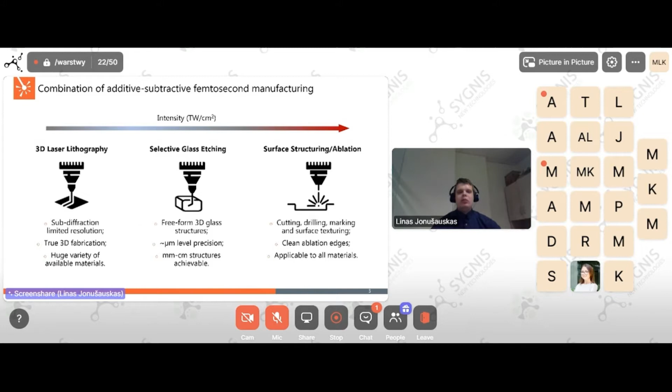We have several technologies at our disposal, and I'll mention the primary ones. The first, and of course the most simple, is just ablation or drilling, also sometimes called cold ablation or cold processing. The idea here is that because we have very short laser pulses, the interaction time between light and the lattice of the material is actually shorter than the heat dissipation from the affected region.

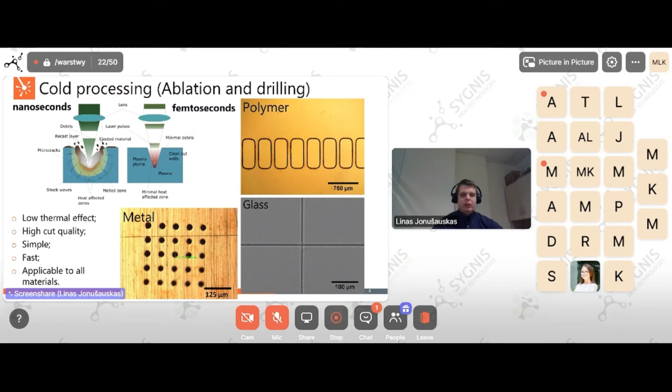So this is why the laser in this regard acts less as a heat source, like most of the other laser systems, but more of a cold tool that basically allows it to ablate. And because of that low thermal effect, we have very high cut quality. We also have a very simple process at our hands, and basically we can cut fast in almost any material imaginable.

Also, if we tune parameters just right, instead of outright removing material, we can actually just modify its surface, or partially remove it and partially modify it. This is what is called femtosecond laser surface structuring.

The idea here is that if we apply it, we can on demand have either hydrophobic or hydrophilic surfaces, which are achieved due to controlled changes in the surface patterns. These can be hierarchical, meaning they can go from sub-diffraction limited nanometric scale to basically hundreds of micrometers in overall size.

And we can also play a bit with surface chemistry, because if we introduce a special atmosphere during the processing, it basically results in different surface chemistry, which in turn also signifies some of these interactions that we want after the processing.

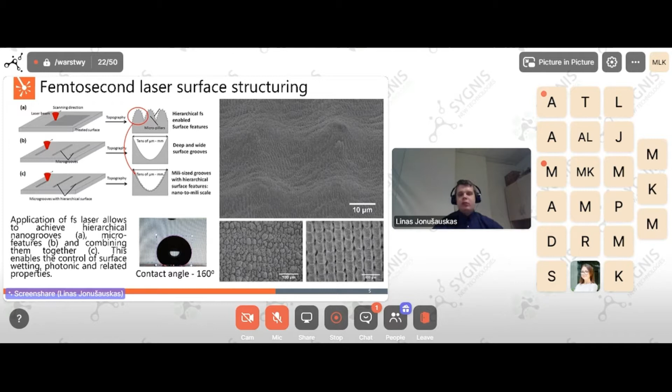This can have multiple different applications, including heavy industry for friction reduction or better adhesion, or otherwise in maritime and aviation industries for anti-icing or anti-fouling, etc. So this is one of the areas we're working on quite actively as well.

Now, these two technologies that I just presented are still more related to 2.5D fabrication, because you still have some limitations due to how you focus your laser light. If we want to go to true 3D, we have to have different processes, and selective glass etching is one of them.

This is still a subtractive process, but the idea is that instead of removing material during the processing, we're actually modifying it in a very specific manner. What it does is basically make it etch a lot faster when we put it into an etching solution, namely HF or KOH. In this way, we can basically have almost an inverted 3D printing, which means that we etch out what was exposed with the laser.

In comparison to, let's say, ablation, we can actually have true 3D shapes, including movable structures like this ball joint chain on the right. The idea here is that we have an outer layer and an inner ball, and basically they are intertwined.

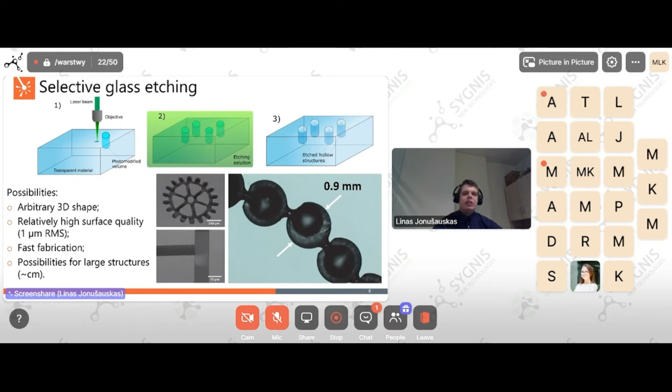What is important is that it's an assembly-free structure, meaning it was not printed, but fabricated out of a single piece of glass. Also, this allows us to have relatively high surface quality, and it's also a relatively fast fabrication process, allowing us to achieve even centimeter-sized structures in reasonable amounts of time.

And of course, if we want true additive manufacturing, we can definitely have it in the form of femtosecond 3D laser lithography, also sometimes known as two-photon polymerization. The important part here is that because it's an additive process, it's induced by focusing femtosecond laser light into a photoactive gel or resin.

Basically what happens at the focal point is that due to sufficient intensity, irreversible chemical reactions take place and the material hardens. While where intensity is not sufficient, the rest of the laser path besides the focal point, the material is not affected.

Then we put it into organic solvents, something like acetone or some alcohol. We develop what was not affected by the laser, and we have a 3D structure. Due to this writing process, we can actually have unlimited 3D architectures which are not bound to layer by layer fabrication.

Also, the spatial resolution can go to very small dimensions, something like 100 nanometers or less, if it is very desired. Of course, normal operation, something like 200 or 300 nanometers, is easier to achieve and simpler. What is most important is that this goes basically head to head with current polymer chemistry advances, and polymer chemistry is an extremely vast field.

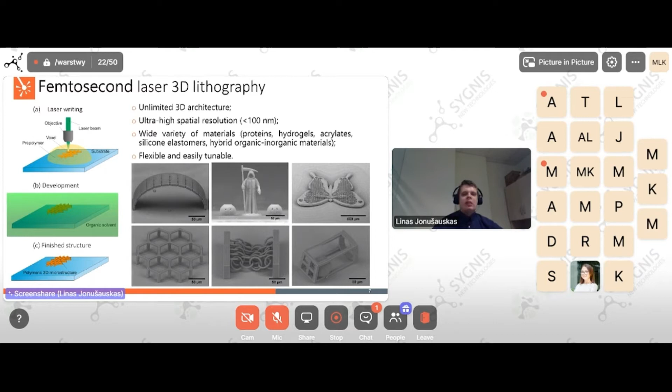Throughout several recent years, we were working quite hard on bringing this technology from laboratory level use to making it basically a widespread and applicable tool. These are just a few examples of structures that we made over the years.

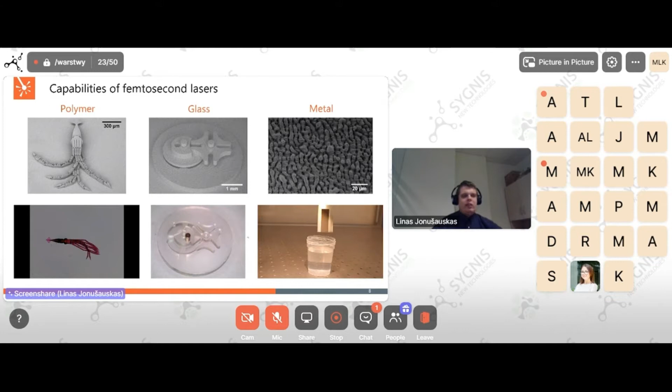These can be micromechanical structures such as polymeric micro robots, like this little squid which moves when the researcher moves the liquid around, or the Geneva mechanism that is freely turning in the magnetic field, or these structured surfaces that allow, in this case, and maybe I will launch it once again, extreme hydrophilic behavior. Basically, the liquid very easily goes up.

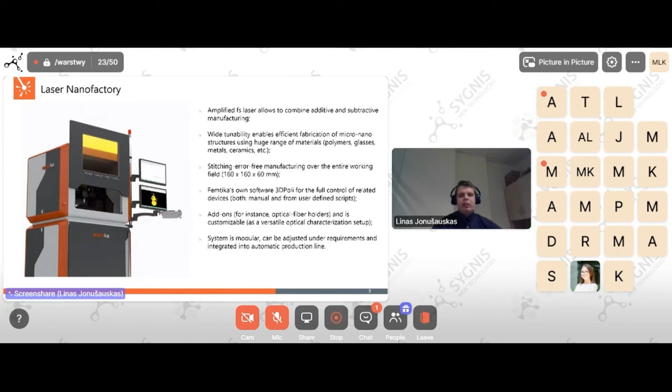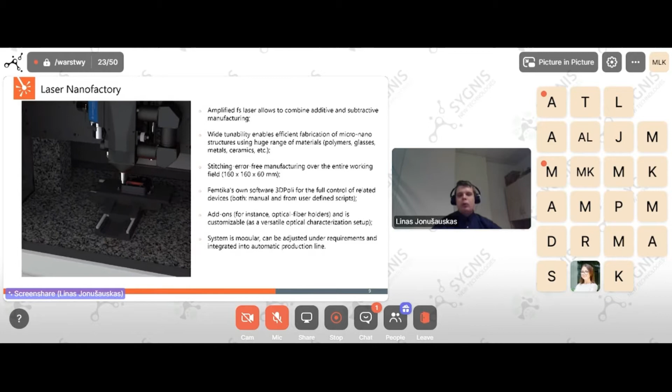All of this is realized with our system, basically the reason why I'm here, the Laser Nanofactory. I could actually talk quite long about it and its features, but the primary keywords here are modularity and flexibility. This system, in a lot of cases when we sell it, is tuned towards the needs of a customer.

At the same time, because of its modularity, it's also future-proof. Because if one day we create new technologies or new ways to process materials, we can backwards fit older systems as modules, allowing newer processing regimes, and some of our customers are already doing that. Basically everything I will show you from this moment on, and everything I showed so far, will be done with the system unless otherwise specified.

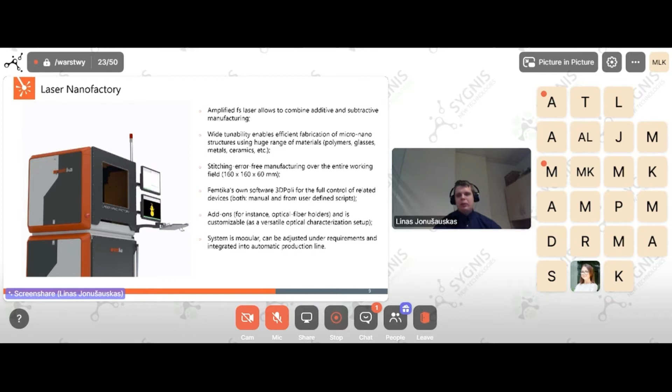Of course, when we talk about the system and this field in general, we want to go from simple toy demonstrations like the squid or Geneva mechanism to actual functional devices. For that, we need a field to target. The field that we're targeting now quite actively is medicine, because a lot of needs of the medical field coincide very well with what we can actually do.

Because the primary challenge nowadays is that we need medicine to be individualized, basically making sure that each patient is getting treatment or procedures specially tailored towards him. At the same time, we want this to be delivered at the point of care. So basically, we want to fabricate whatever is needed as fast as possible wherever the procedure will be carried out.

At the same time, it has to be effective. We cannot compromise on this at all, because the medical field requires very high effectiveness. Even nowadays, when we saw how much the modern world is dependent on effective medical care, this is signified quite a lot. At the same time, it has to be flexible, tying in with the individualized aspect of this all. And most importantly, it has to be affordable.

Because when you think about it, throughout the years a lot of scientists and engineers proposed a lot of different device and treatment concepts, but a lot of them fell short just because they were extremely expensive, and the effectiveness-to-affordability ratio was just not sufficient. To tackle all of these challenges, which in some ways can actually be counterintuitive to each other, like effectiveness and being affordable, a multidisciplinary approach is needed, and only then can we tackle these challenges.

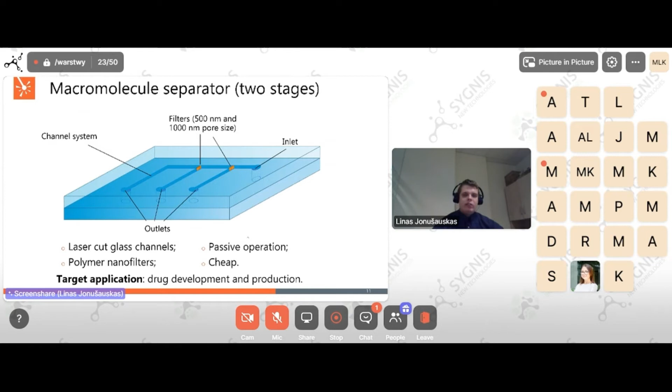Otherwise, our target applications are drug development and drug production. And these days, this is quite an important challenge. Now, for this, we use the same nanofactory setup, and I just wanted to show the insides of it. The primary idea here is that we have a very flexible laser, a Light Conversion Carbide laser, which supports 2 wavelengths. We have an appropriate optical chain to control it.

And what else I can stress is that we also have a built-in imaging system, which allows us to track fabrication in situ in real time. Also the linear stages and scanners are synchronized, which allows us to achieve this mentioned high speed of fabrication as well as very high precision. This is our standard system, and I will show some different variations throughout this presentation, and you will understand why modularity is so important.

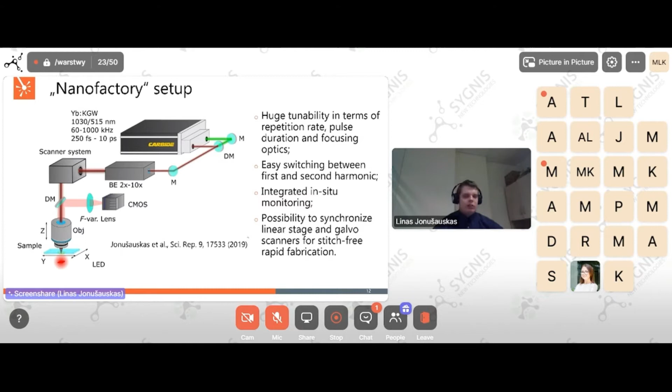Now, for this particular challenge, we need 2 different structures that will need to be merged together. So first, we need filters. We did a very simple experiment where we fabricated different pore sizes by changing the hatching distances between lines. We saw that the relation is near linear and actually very controllable and quite well repeatable. Pore sizes that we managed to achieve were from around 250 nanometers to 1.5 micrometers. Of course, at very small pore sizes, these start to break due to capillary forces and other effects.

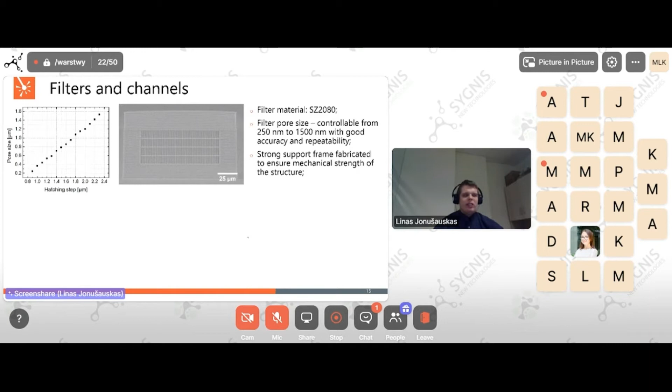So maybe some more advanced processing would be needed in future, but so far we went for experimental structures with 500 nanometer pores. And at the same time, if you notice, we also made a strong support frame. The idea here is that due to strong support, the whole structure has rigidity, but at the same time, we perform what is called dynamic slicing and hatching, and the surface of it is not really nice, but it's strong enough.

And at the same time, we need channels. For channels, we use just simple cheap soda lime glass. It was cut with the same laser nanofactory setup. We just replaced the standard lens with an aspherical lens. And again, because we were aiming at fast fabrication, we noticed that our theoretical profile differs from practical within around a 5% margin, but we consider that good enough. So we have these two different components.

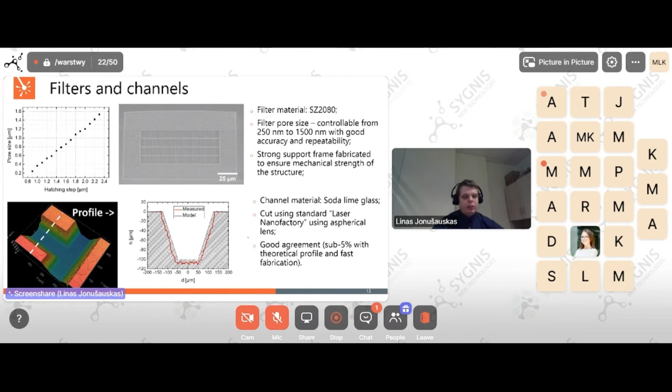Let's merge them together. We integrated filters into channels. We saw good adhesion and good mechanical stability. Our initial channels had quite rough walls, and we wanted to potentially improve it by performing HF etching before filter integration. It helped partially, but we consider that it's not worth the hassle of dealing with a dangerous chemical. But otherwise, in principle, this worked pretty well. Although it doesn't really look that nice in SEM images, it works just fine, and the structure is quite mechanically robust. So we have a channel system, we have an integrated structure.

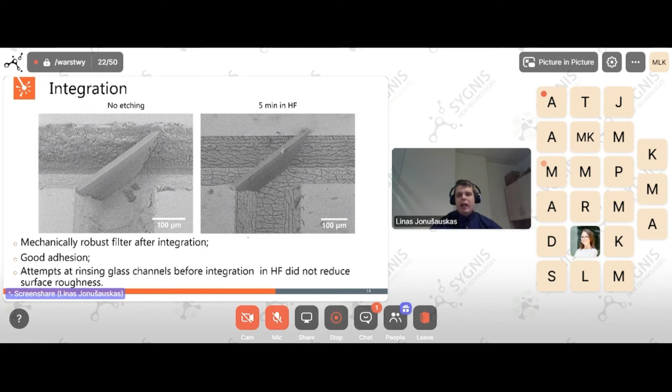So the question now is how we seal it. Normally we could use a lot of different techniques such as welding or selective polymer bonding, but the problem is that we need to have very good alignment, and we also need to have very good optical surface contact. This complicates the process, and it makes it less repeatable. So our researchers proposed a different idea of using thermal bonding.

The idea here is that we start with a clear polymeric slip, and we put it on our glass microfluidic system with integrated filters, and we heat it up to 190 degrees Celsius. What happens is that this clear thermoplastic starts to partially melt and bonds to the glass channel system without any additional operations.

And this is why I mentioned the advances of polymer chemistry, because for filters, we're actually using quite a resilient hybrid organic-inorganic photopolymer that is not affected by this thermal process at all. So it means that because we can use different polymers, we can actually achieve a favorable overall outcome.

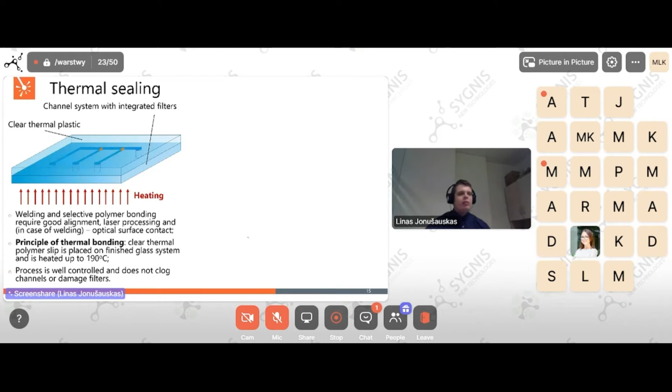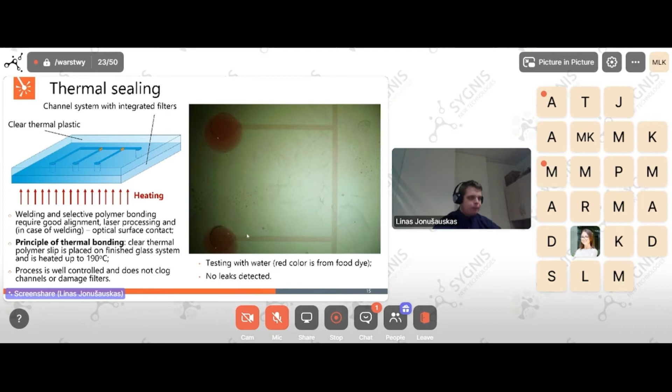And because the process is actually controllable, it doesn't clog the channels, which is proved by this image where we actually use just simple water with food dye, and we saw no leaks or other defects. However, let's very briefly return to the channel quality. It is good enough, but we want to make it better.

So we proposed using what is called burst mode fabrication, and this is where modularity comes into play. Because instead of a standard Carbide laser and sharply focusing optics, we actually used a nanofactory variant where we have a more advanced Pharos laser with burst mode capability. And also we replaced the simple focusing lens with an f-theta lens, which means that we have substantially higher processing throughput.

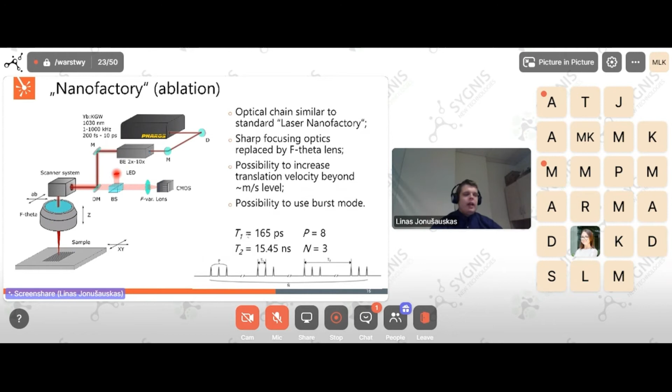And basically, without going into too much detail, because this is still the far front of photonic science, and this is why, as I said, we do a lot of in-house fundamental research. Basically, burst mode fabrication allows us to control thermal effects even better than just simple femtoseconds. So we have femtoseconds and burst mode fabrication. This allows us to have both meter per second level fabrication speed and substantially better channel walls.

And this also results in very good filter adhesion. This can also be sealed with the technology I presented before. And this signifies why having modularity in the system is such a powerful advantage. And overall, these channel systems are now provided to our biochemist colleagues, and they are now doing filtration experiments, hopefully as we speak. So this is the first concept.

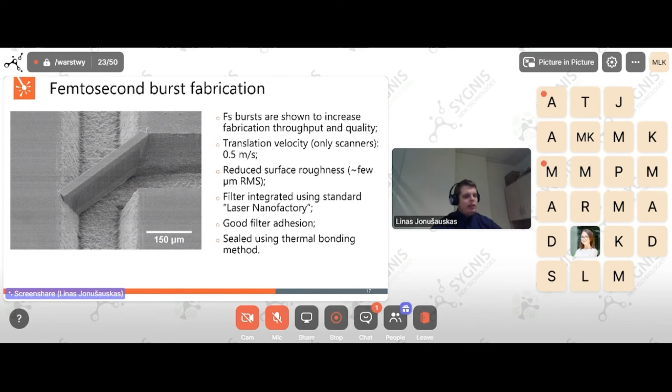The other concept is mechanically flexible scaffolds for cell growth. Scaffolds are quite a vast field these days, and the idea is that we make a structure which allows us to either perform research on cells, or potentially cultivate cells for different uses, or grow cells for implantation in a living body. And these are very promising prospects in biological sciences.

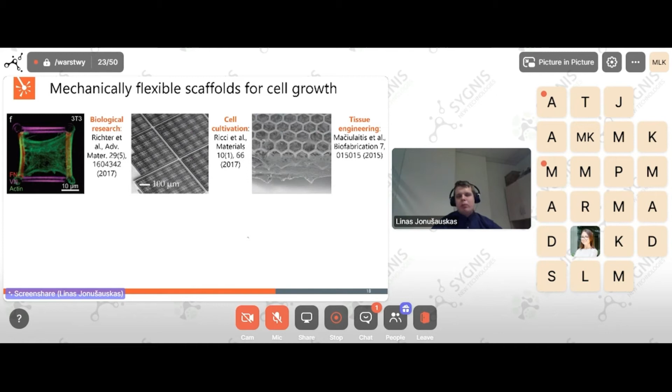The problem is that most of the normal materials that are used in this technology are rigid in a mechanical sense. And of course, the body is moving constantly. So putting something rigid into a moving body might not be the best idea ever. So basically, there are two choices. One choice is to have a flexible polymer, and albeit these are coming along and we're experimenting with them as well, there's still a long way to go before we can proceed from proof of concept level fabrication to highly efficient fabrication.

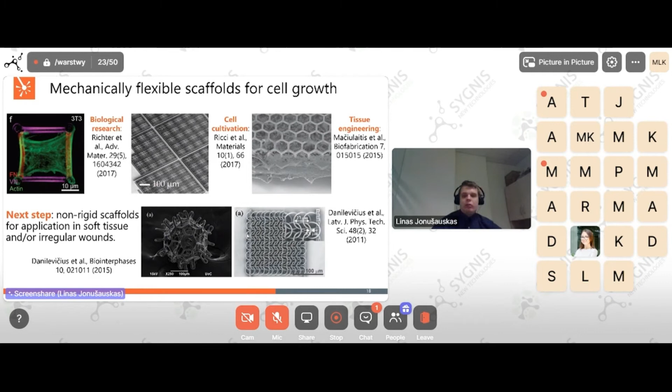So another way is to actually tap into the potential of having a geometry of a structure which is shape-shifting in some way. This can be very small balls that can actually shape-shift into a wound or a disease-stricken place, and basically have an adaptive shape like that. And of course, cells are living in these little burr balls. Or alternatively, we can look back to the Middle Ages and just fabricate something like a chainmail.

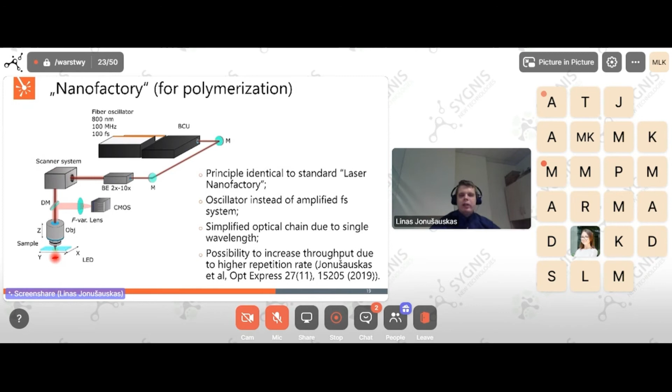And for that, we also use a different nanofactory version. This one is using a lot simpler, a lot cheaper fiber laser. This allows us to have just polymerization, but at a lot higher speed, because when we have an oscillator, we have a high repetition rate. This is good in that pulse overlap is higher, and we can potentially have bigger fabrication speeds. So this is the reason to use different laser sources, and this is the consulting that we provide when we understand what our customer needs.

Now, to fabricate these structures, and again, to make them affordable, we have to make them fast. So to demonstrate how we can increase fabrication throughput, we wanted to do these experiments in different fashions. One way is to just plainly increase translation velocity. This is the simplest way to do it. But at the same time, there are some fundamental limitations on how fast you can go. So what about if we play with the algorithm we use for fabrication?

So simplest way, we start with a 10 by 10 ring array. We start with the standard fabrication parameters, which is 1 centimeter per second translation velocity for synchronized motion, or actually 10 centimeters per second if we use only galvo scanners. And we start with just raster scanning of the whole STL model, including all of the gaps. And then fabrication time for just this simple small structure is around half an hour.

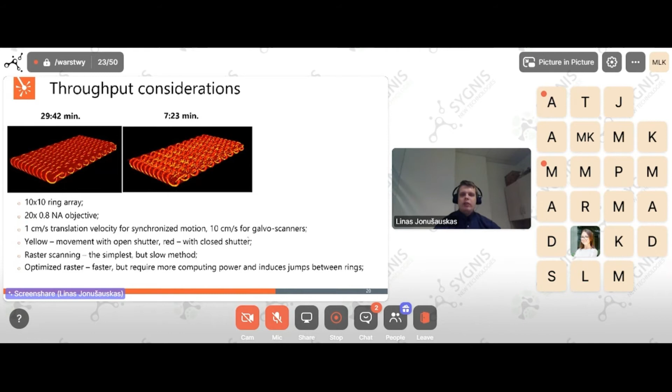And then, because the scanner working field is big enough to accommodate one ring but not all of the structure, we can fabricate each ring individually, which allows us to use scanners and then motion of the linear stages to go between these rings. And then if we use the higher fabrication speed, we can actually reduce fabrication time even more. And if, of course, we use just simple translation velocity, it's surprisingly even slower by around 1 minute.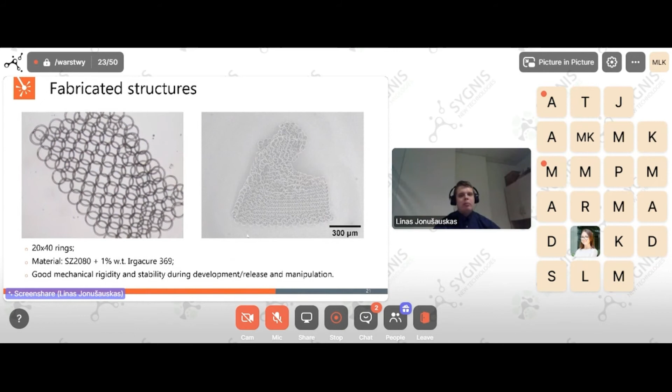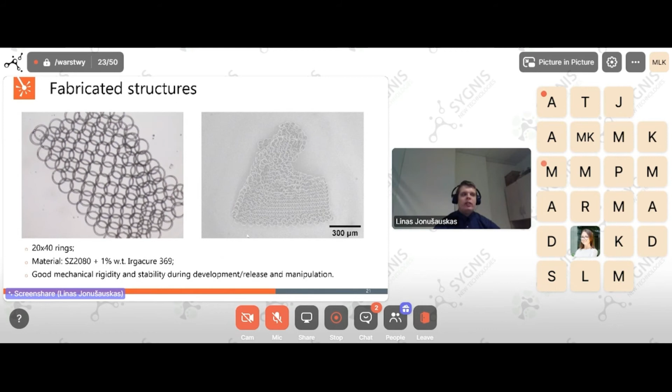Of course, for medical use, we need a bit bigger structures, basically, again, as I mentioned, in millimeter size. And we're using material which is shown by other groups to be biocompatible. And at the same time, it provides good mechanical rigidity and stability during the development process, as well as during the manipulation needed for biological experiments.

And when we talk about biological experiments, our partners in Lithuanian Healthcare University actually did some initial biocompatibility testing, and this showed to be quite promising. And as I said, structures survive manipulation just fine, although they need to be pushed to the side or positioned appropriately. Cell adhesion to the scaffold is also quite satisfactory, which means that this can actually be used as an implant to, let's say, a moving tissue, or alternatively as a shape-shifting scaffold.

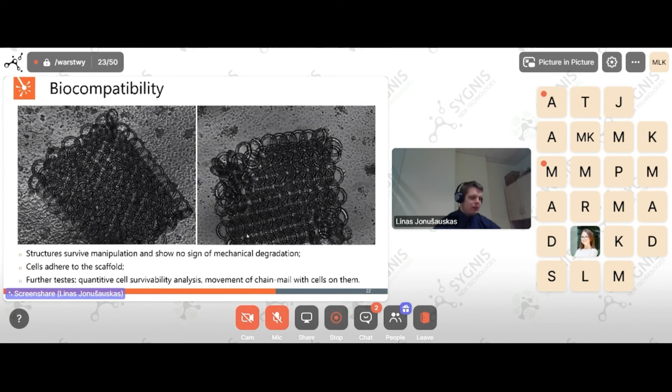And basically, at the moment, we're preparing samples for quantitative cell survivability analysis, as well as movement of chain mail with cells attached to them, because basically no one tried this before. And my slides are trying to jump to the last topic because I see that I'm running out of time, but this will not be that long.

And finally, it's additive manufacturing of conductive structures. So in Femtika, we can additively print out of polymers, as mentioned before, actually different kinds of polymers. We also have ceramic fabrication capabilities, which were presented throughout the year, so I didn't include it here because for us it's almost old news. But now we're moving to conductive structure fabrication. And you can do it in two ways.

You can do it either as direct fabrication, which is very slow, tedious, requires very specific materials, and it requires a lot of development. Or we can actually metal plate pre-existing polymer structures. And the advantage here is that we can actually use basically standard materials, which means that fabrication throughput and achievable geometries are quite good in comparison to these just barely 3D structures presented by other groups.

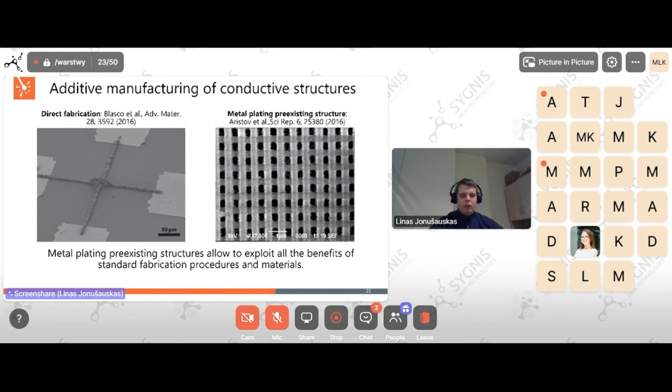So how does it work in practice? So in practice, there are some chemical steps, and I will not go into too much detail here because this is quite hardcore science, and I would like to keep it simple. But we start with just simple photopolymerization. An important part here is that we have special groups attached to our standard

silver moieties to these structures, which basically means that we have standard polymer with a special additive that then bonds to metal ions. And then we can actually perform silver ion reduction in a special solvent, which then results in plating of this material. So there's a lot of chemistry, a lot of fancy images, but overall what it means is that we have a way of metal coating polymers, and most importantly, this is a selective process. So if we have the special polymer structure, let's say in a glass channel, the glass channel will not be metal coated and the polymer will be.

Great, so where can we use this? And to use this, we propose an electromechanical flow meter concept. And the idea here is that we are basically combining a valve and a spring into one structure. So we have a stationary wall, then we have a moving valve, and because both of them are metal coated, that gap between the valve and the stationary plate basically forms a capacitor.

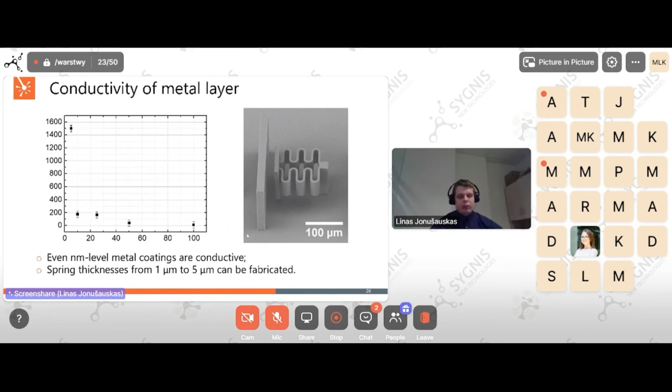And what is more important is that these structures can be integrated into other structures. And basically we have here this spring structure in a glass channel. And a glass channel was etched, again, owing to the possibility of having this hybrid fabrication capability. And overall, it also means that we can actually have integrated structures within integrated structures that also tap into advances of polymer chemistry, as mentioned before.

And this brings me to my conclusions, and they are actually pretty simple: direct laser writing is a very powerful tool, and we'll see a lot of possible applications in biomedicine. And this is due to the fact that we can have huge tunability in single feature size, in overall size. We can very freely choose materials, and basically we have very limited limitations in terms of what geometries we can achieve.

And what is most important, this is available. This is not some technology locked in some university lab and basically working once every full moon for publication. This works repeatedly. This works when it's needed. And basically, it's a commercial state of the art, which is available commercially.

So thank you. And actually, I have to apologize. I don't know why my computer is acting up and doing automatic animations. So otherwise, thank you for your attention and your patience.